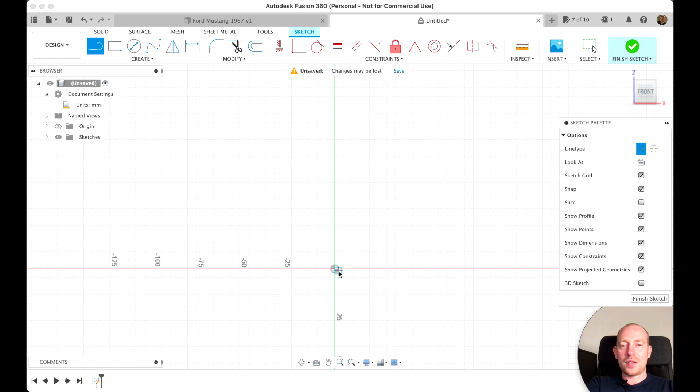So we're gonna go from here up, and that will be 10 in. 10 in means 10 inch, and 10 inch because we will use this center point as our axis. So we're making a 20-inch wheel, so we just need to make half of it, and then the rest will be revolved. Well, let's make one more line,

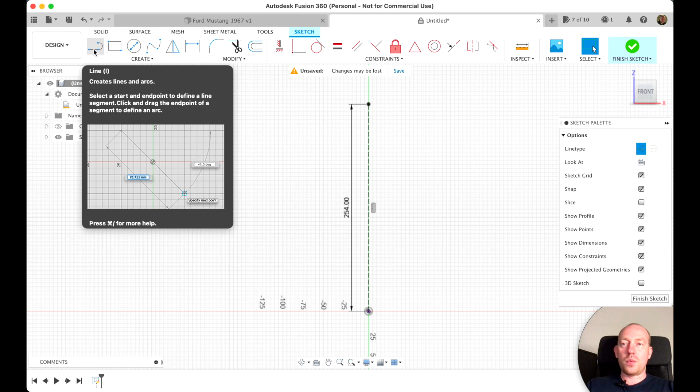and this line will be, you see, I put my mouse on this point, and then when I drag away you see the line, also a kind of construction line, that shows me that this line will be on the same level with this line. So this will be 255 millimeters.

I press enter. Okay, so now we need to align this line with this point so that this line will be in the middle. For that I will press midpoint, choose the line and choose this point. So now it's perfectly aligned. Okay, so now we're gonna start creating our alloy wheel. For that I'm gonna untick construction.

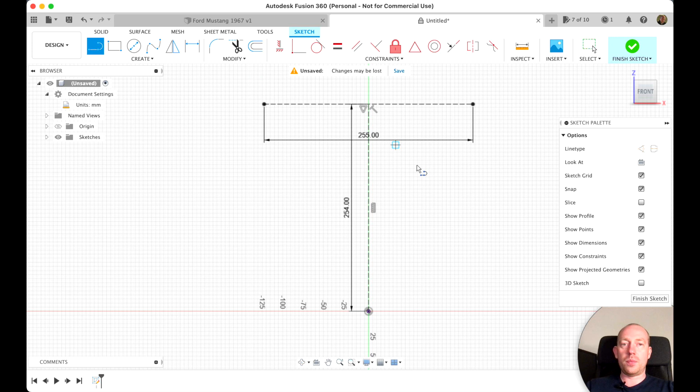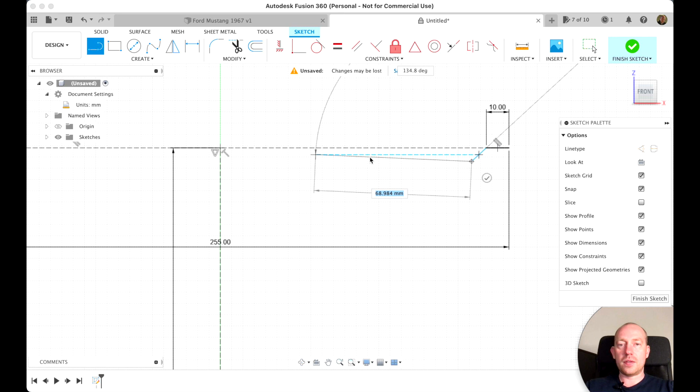I'm gonna press L or just choose line from here, and I'm gonna start creating the alloy wheel. So I start from here, let's say 10 millimeters, enter. Then I press L to make a line again, somewhere at an angle like this. Then another line, let's say until here. Then another line at an angle right here, and like this.

Okay, so now I press letter O in order to make an offset. I choose our sketch that we just drew, and let's say how big are the wheels. I think it's around 10 millimeters. Enter. Okay, so now I'm gonna choose mirror, and what we're going to mirror: this line and this line.

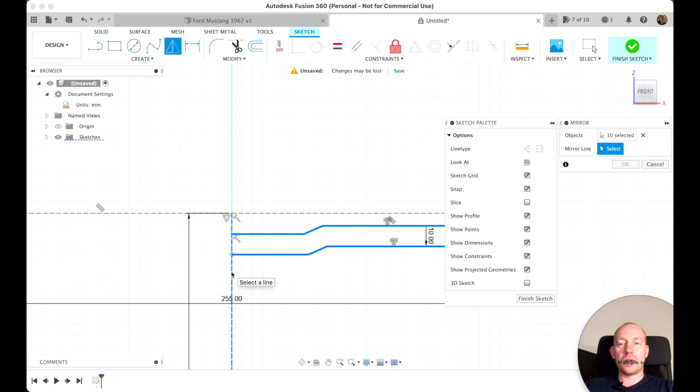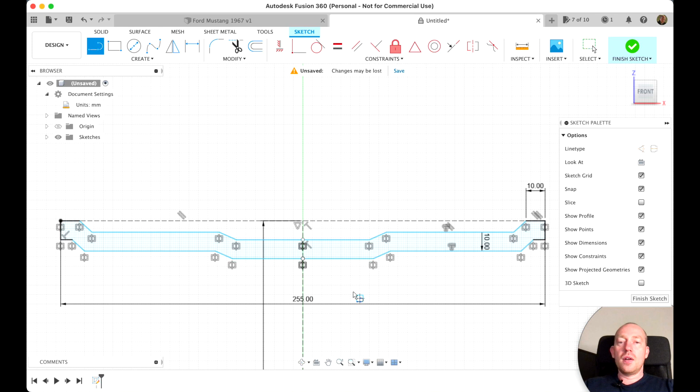I'm double clicking here, and the mirror line will be our construction line. I hit OK. So now we need to close this sketch. I choose line, this point and this point, and then the same on the other side, this point and this point. We could do that before, but I forgot. Okay, so now we have this beautiful shape. I click finish sketch.

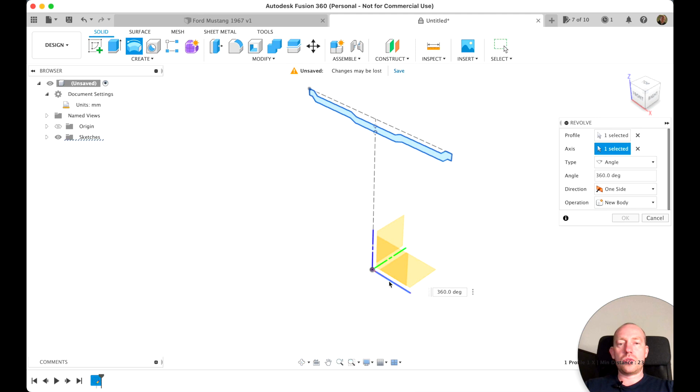Okay, and all we have to do is just revolve. So we revolve this profile, and now it offers us to choose an axis, which is this axis. Yeah, I think it's the x-axis, so I choose this axis, and here you go, we have something that already looks like a wheel. I hit OK.

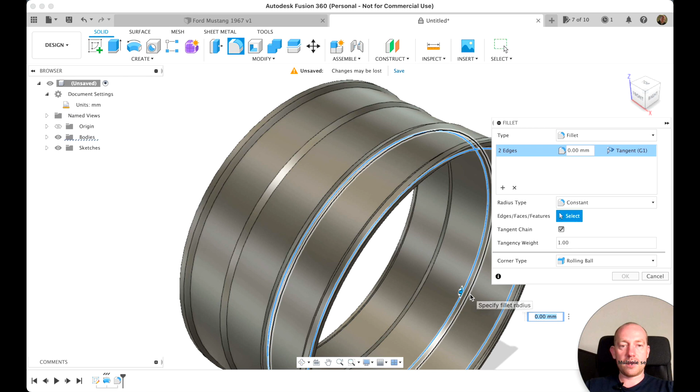Now let's apply some fillets. So I choose fillet, and we need to apply fillet on this line and this line. So let's say 2 millimeters. Enter. Then we apply some fillets on this line, this line, this line, and there. Where is this inside? Let's have a closer look. I think it's here. Let's call it also 2 millimeters, so that the metal doesn't look very rough. Okay, great. So this is our first part.

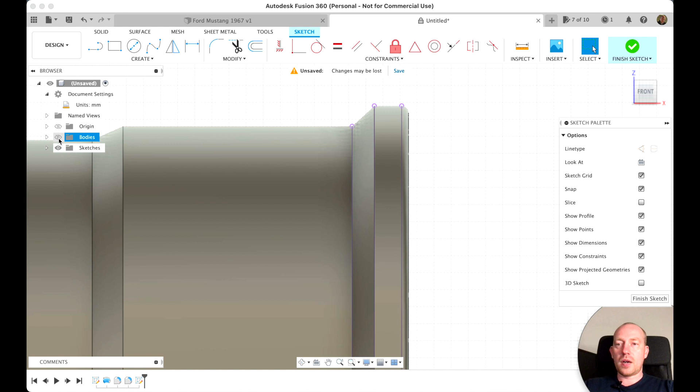Now we create a sketch on this profile. I click on it. I wanna have this and this line in my sketch, so I'm gonna press letter P to project this and this line, maybe this also, and I hit OK. Okay, now I can hide this body. So this is our midpoint of the wheel, so now we need to make a shape, something like this or like this.

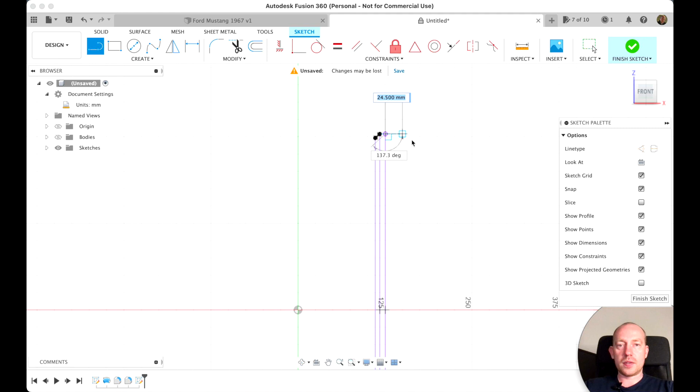You will see why we need this shape. So let's connect first this, and this line, just like that, yeah?

By the way, if it's a black sketch, that means it's fully constrained. You cannot move it, you cannot do anything with that unless you make it unconstrained. If it's a blue sketch, let's say like this one, then you can move it, you can readjust it, and all this kind of stuff. So let's delete this line, we don't need it.

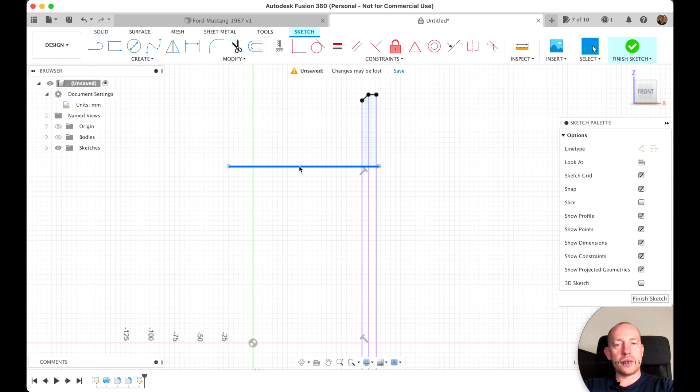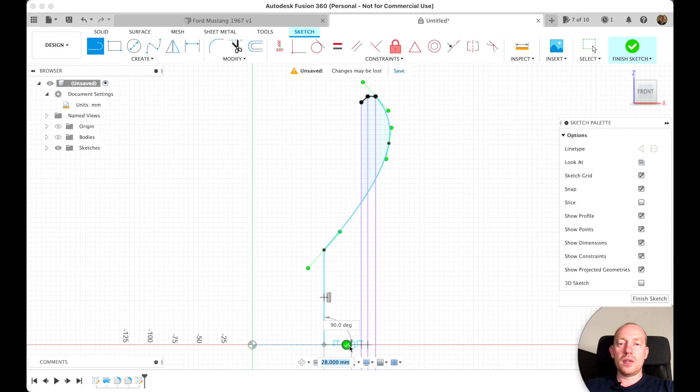Okay, so let's create some fit point spline, starting from here, and then maybe a little bit right here, and then it will go all the way here. I click this green check mark, then I construct one more line from here until, see, I'm using this as a reference, and then I'm dragging, and I need it 90 degrees, finish. So I click exit to exit the line command.

With this we can adjust a little bit the shape or maybe the angle, you can just play with it and see what fits you better. In the future you will see why I'm using that. Okay, so that's our line. Now I double click on this line and I press O to make an offset, and I just move it approximately 15 millimeters. Yeah, I think it will be fine. So 15 millimeters. Okay.

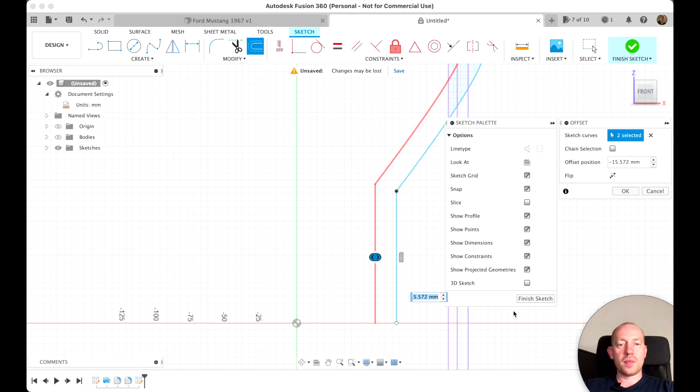Then I press L to make line from here until here, and that's it. If it turns blue, like this inside blue, that means our sketch is closed. So this is a very dirty sketch. Please don't judge me very badly, but we need to make it fast, otherwise we have not much time. Sorry, what I've just did.

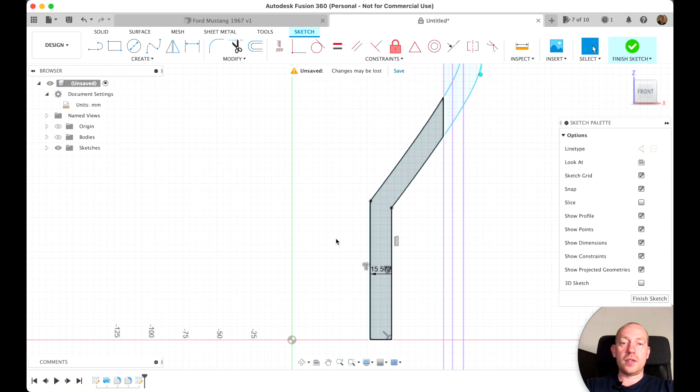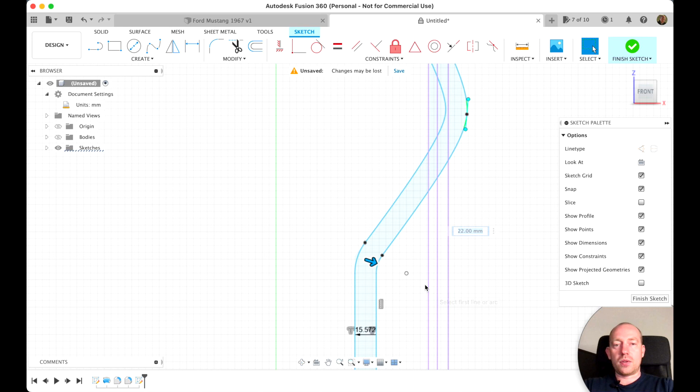Yeah, so I choose fillet here, and I just want these lines to be more smooth. You see, it's like cutting this corner away, yeah? So if I press here, it just cuts this corner. If I press here, then it makes it all smooth. It's not always like that. Sometimes you need to come back to another corner and make it, let's say 22 millimeters, whatever. Okay, enter. So that's our finished sketch.

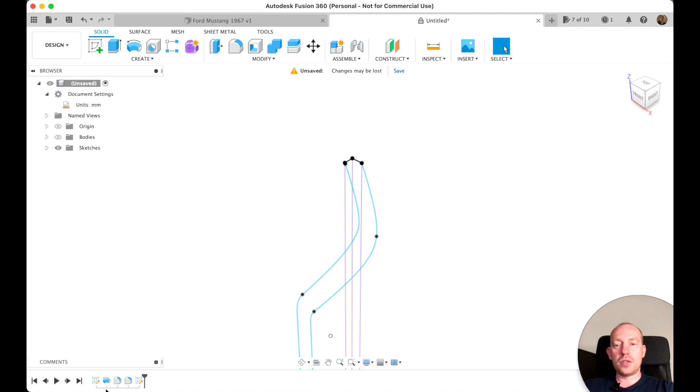And now all we have to do is just revolve this, and need to zoom in. So I'm zooming in, and this. You see, something is not really closed. Cancel. Okay, we can come back in our sketch right here. I right click, edit sketch, and as we can see, yes, this sketch is not closed, so let's just simply close it. Here it doesn't really matter. Okay, now should be fine.

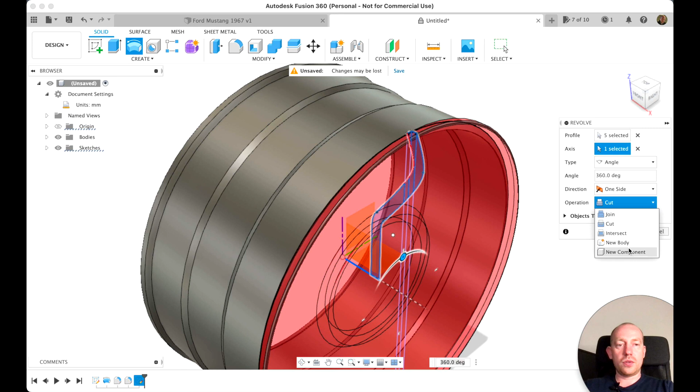Finish sketch. So now we're coming back to revolve this, and this part. Perfect. Now axis will be our x-axis, and since we don't see any bodies, we need to switch on our bodies, right? So now it offers us to cut out of our disk, but no, it's going to be new body. That's it. I press OK. So now from bodies I can hide the actual wheel, and we will have to create sketch on this plane.

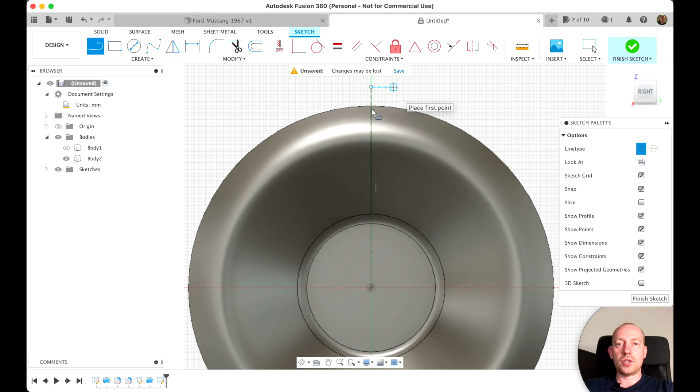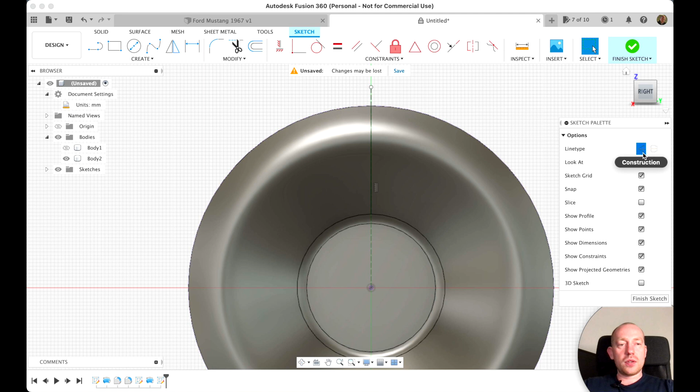Right, so now I will create construction line. This line will be construction from this point until whatever here. Check. Now I press escape to exit line command and press P to project this circle in my sketch. I hit OK. So now, as you can see, if I switch off the body, I have this projection line that we just projected. Okay, I unclick construction. Let's make simple line, yeah.

So it will be something like this, then maybe like this, maybe then it will be, just use your imagination. I don't know, something maybe like this. Then the next one will be like this, like this. Maybe some professional designers will laugh at me right now, but we'll see the result and then we'll see what we get with that.

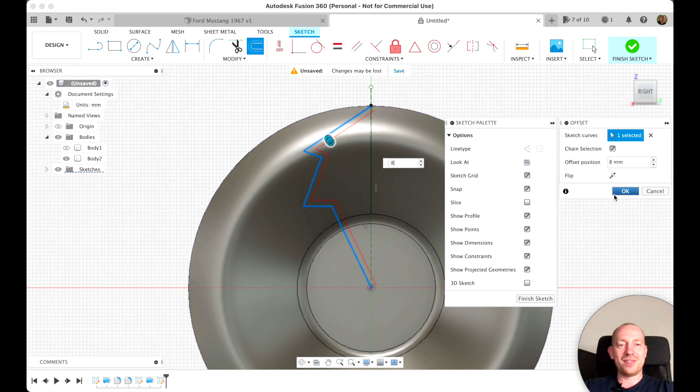Okay, I exit line command, then I need to do offset of this line, so I press letter O. I choose this line. And now I offset this line, let's say this much. It's 8 millimeters, so let's make it 8 sharp. And okay, so now we need to close this sketch. Let's hide the body for now and zoom in there where we need to close our sketch. So I press L to make line from here until here.

Okay, let's trim this part, and let's trim this while we are in trim. To trim, it's either those scissors or you just press letter T to trim.

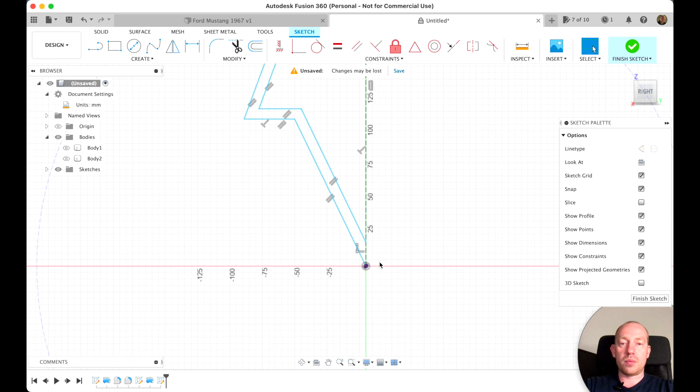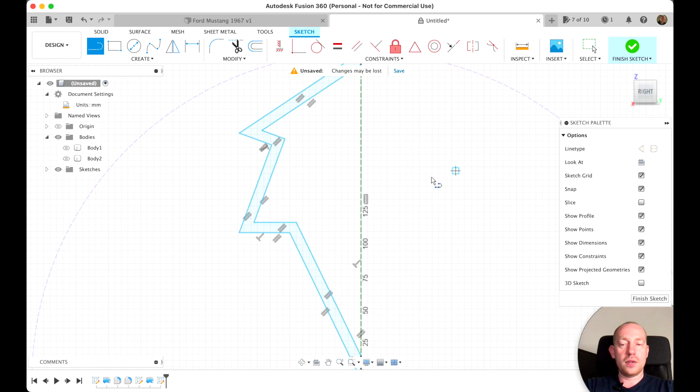So I hit escape to exit trim, then L to make a line from here to here. We see the sketch turns blue, that means it's closed. I press escape, now I press mirror. I double click on this sketch, it selects all of it, then the mirror line will be the line right here, and I click OK.

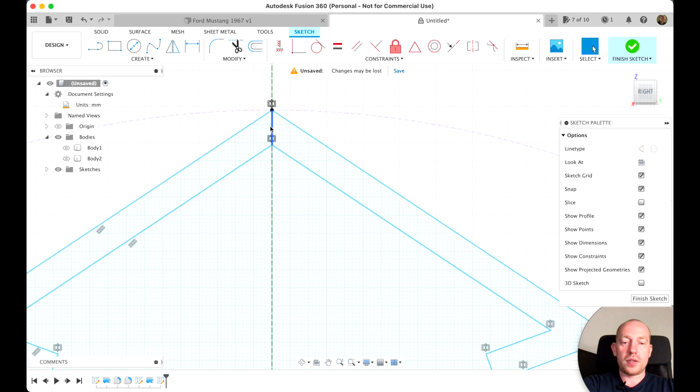Now we need to cut some lines, so this line we don't need actually. I press letter T to trim this line, and then I press letter T to trim this line like that. Okay, so that looks pretty good. Finish sketch.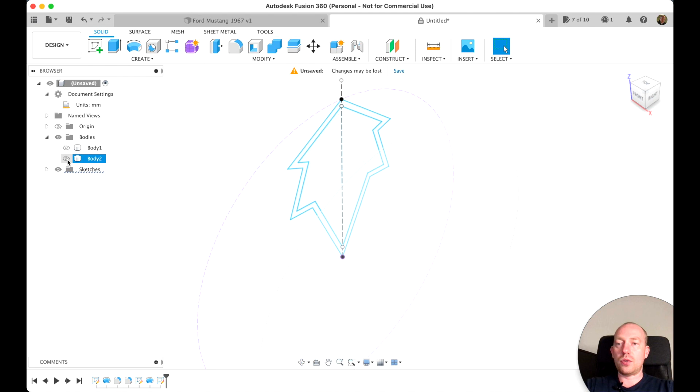Now let's turn our second body on. Extrude. We choose this sketch, we're going to extrude it all the way just like that, and operation will be intersect. So you see we have this beautiful part for our wheel.

It's looking right now like some kind of Christmas tree, but before we actually do the fillet later, we better do the fillet now.

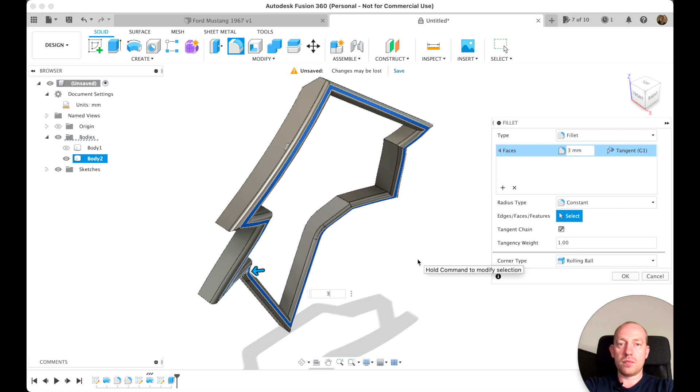So I'm gonna choose this profile, like that. Yep. And the fillet will be, let's say, 3 millimeters, 4 maybe, no 5, it won't let me do 5. Yeah, so let's make it 4. So 4 millimeters will be the fillet for this part. From inside, no, we're not gonna use anything from inside. And then I hit OK.

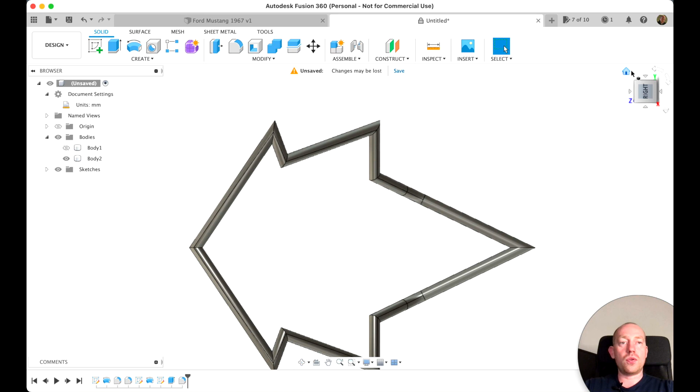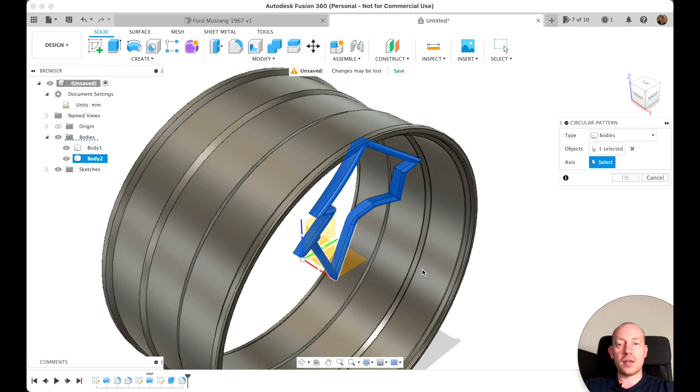Now comes the hardest part for the laptop or whatever computer you're using, because now we're gonna do some circular motions. So what we're gonna do now: create pattern, circular pattern. The type will be bodies, the body will be our new body, and the axis will be this axis, the x-axis. Oh, you see, lately I had 40 pieces in circle, I was working with 40 pieces.

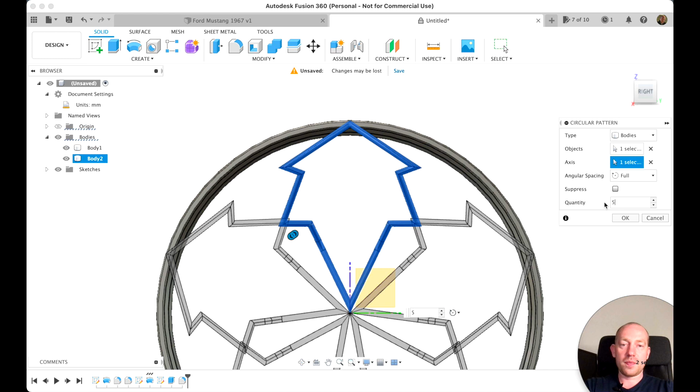It looks pretty good, but it's gonna take us forever to make this. Let's see what happens with 5. It looks very catastrophic, but yeah, so we need, let's say, 18.

So imagine if somebody drives with those kind of wheels. Yeah, I would say, wow, you have cool wheels.

So let's make it 36. You can play with it like you want to play, but the more pieces you have, of course, the slower the computer is. Right now it's just thinking too much.

Okay, so that's our 36. Let's try to reduce a little bit, 30. Oh no, I made it again 230. No.

But I mean, come on, these wheels look like, you know, some future wheels, whatever Tesla is gonna make there, I don't know. So we stop with 30, yeah?

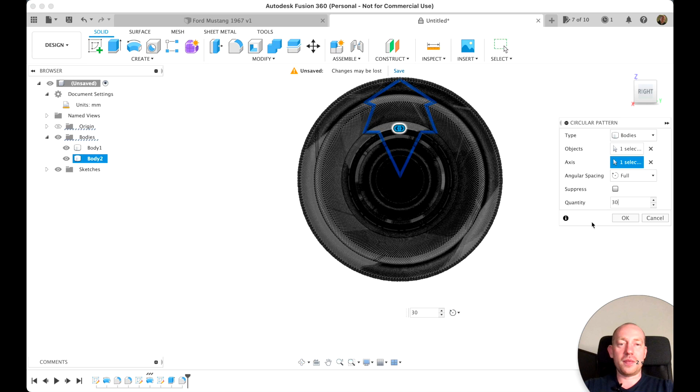Okay, then I just simply click OK. And there you go, now we have kind of 30 bodies, which gives us a lot of headache in the future, because right now we will have to join all of them.

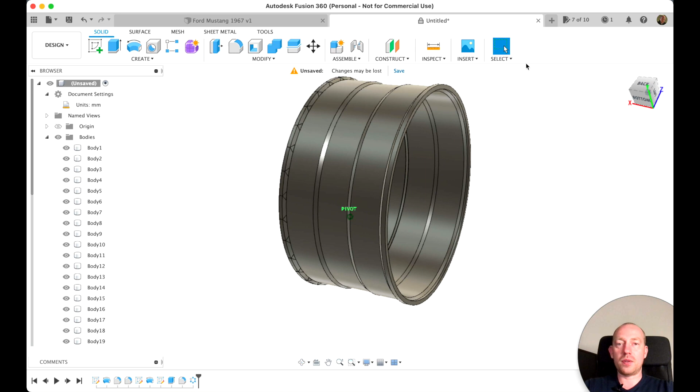Well, it is kind of interesting wheels, if you look at it, wow. Okay, so now we choose this body and we have here combine. Tool bodies will be, let's try to combine half by half.

Let's say these 7 pieces. Operation join, we don't keep the tools, okay. We're gonna do it little by little, because if I take just all of them, then it will be forever.

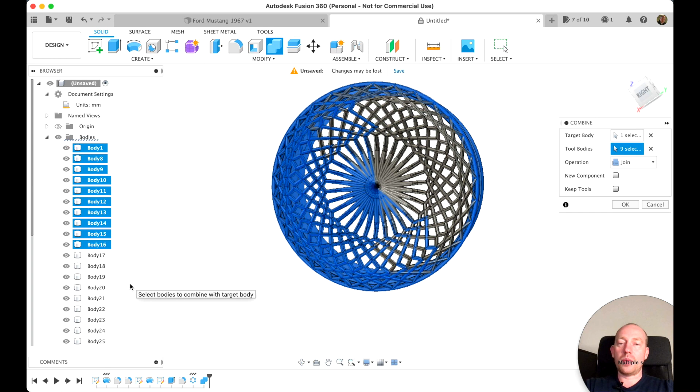Okay, so let's do it again. Target body will be this body, and the tool bodies will be, let's say, from here until here. By the way, how I'm selecting multiple bodies: I just click on one body, then hold shift, and click on the rest. And then it selects the whole bunch of bodies.

As you can see, it slows down the computer. Okay, now when we have all the bodies selected, let's just hit join, and I'm afraid I'll go make a tea. I'll speed up this process while it's joining, but I think it's going to be around 1 or 2 minutes. Don't go away, it's just gonna be for you 2-3 seconds. Okay, let's hit that OK button.

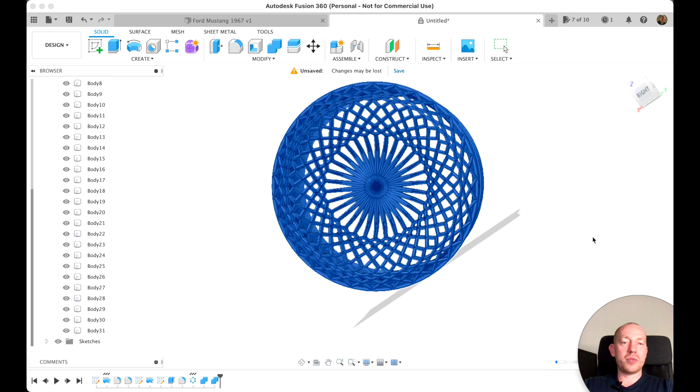Okay, here is some progress bar, and then I'll go make some tea. Okay, looks like it made a great job in creating this wheel. Let's have a look at it. I think it's pretty good, yeah.

Thank you very much, computer, you did a great job for us. So we don't need to construct something super extraordinary. Right now, we need to put the tires on it.

So for that, we're going to activate this very first sketch, and let's create one more on this plane. So we can hide this body, and now we're just making the tires.

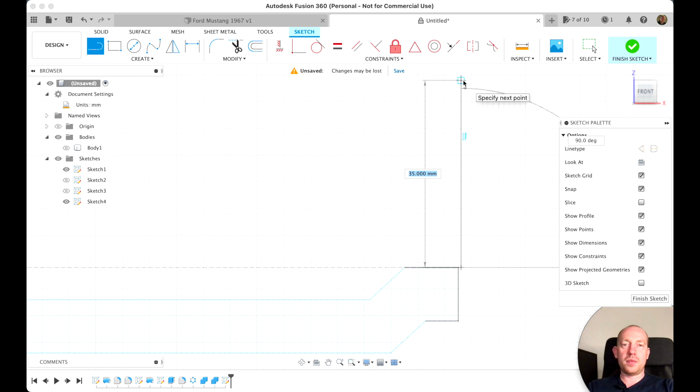Let's say a little bit from here. How big is the tire? Well, it will be 35 millimeters. Then we're gonna go just simple like that, like that. It's just for formalities, you know, that we have a fully proper tire.

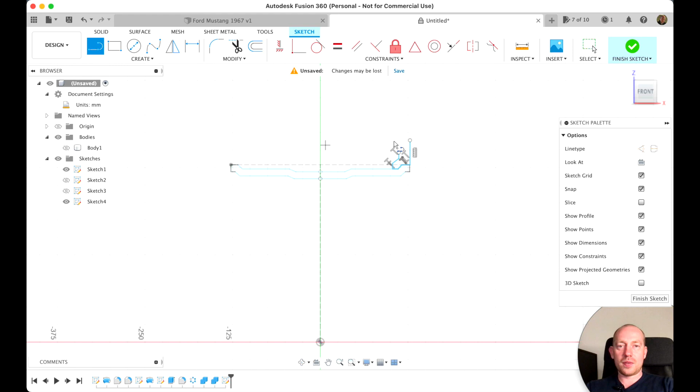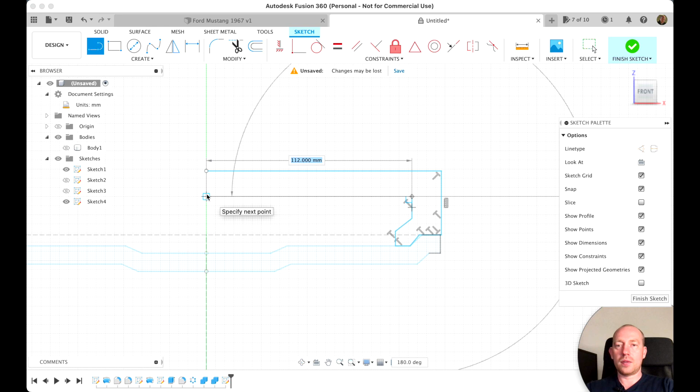I press L, line from this point and from this point, just like that. And let's make it higher until here, and then one more line from here until here. So 90 degrees, 180 degrees, yes, correct. Like that.

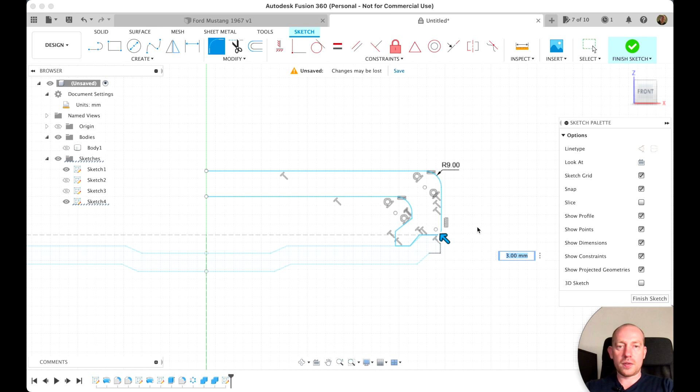Okay, that looks like a good tire for me. I choose fillet, this and this, 9 millimeters, okay. And then here also we make some fillet. Then I'll make one more fillet right here, just a small one. Okay, that looks pretty good.

Now we will have to create a construction line, and let's say something like this. Okay, and now we just mirror all this sketch. I double click on the sketch here against this line. Okay, so that will be our tire. Let's finish the sketch and let's revolve, right here, revolve this sketch on this axis.

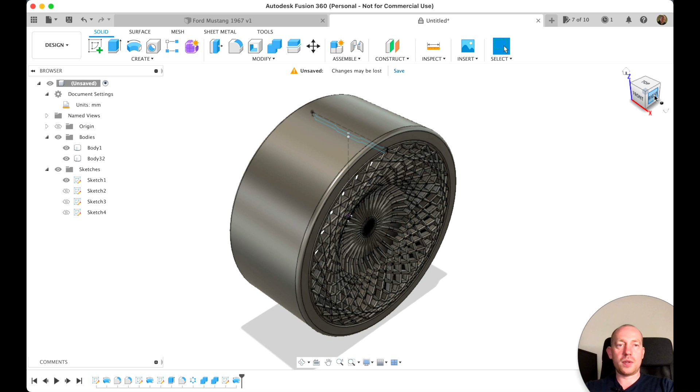New body. Okay, now let's switch it on. Okay, we have something like a wheel, a very weird looking wheel, but it's okay.

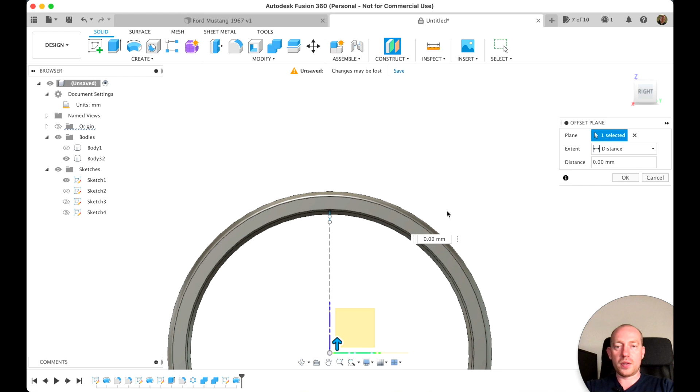So now let's make some drawings on this wheel. We will have to construct an offset plane from this plane. So I choose construct, I choose this plane, I look to the right side of my wheel, and I just drag it until it's slightly on top of the wheel, something like that, yeah, and I hit OK.

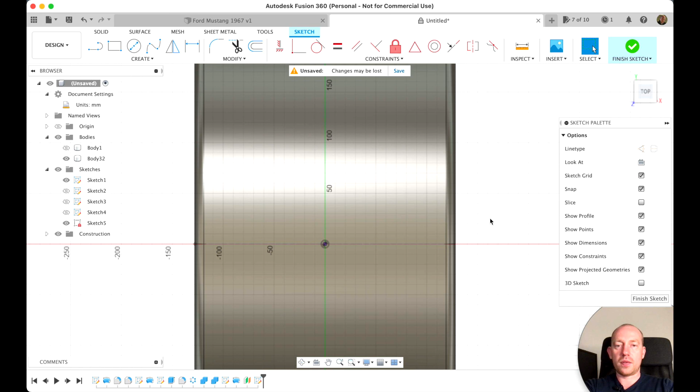So now we create a sketch on this plane. As you can see, we're already working with planes. And now what we have to do is create nice lines, let's say somewhere from here until here, until here. Okay, now offset this line 3 millimeters, enter.

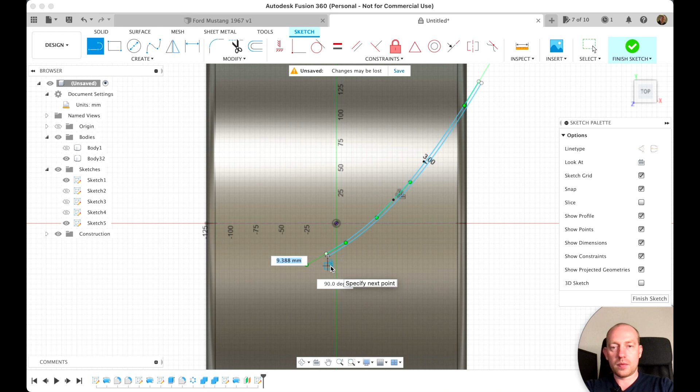Now connect this, sorry, something is wrong, connect this and this, then we connect this and this. So now I want to approximate this center will be parallel with this center. So I exit the line command, I select everything, I press M to move, and basically now I can move.

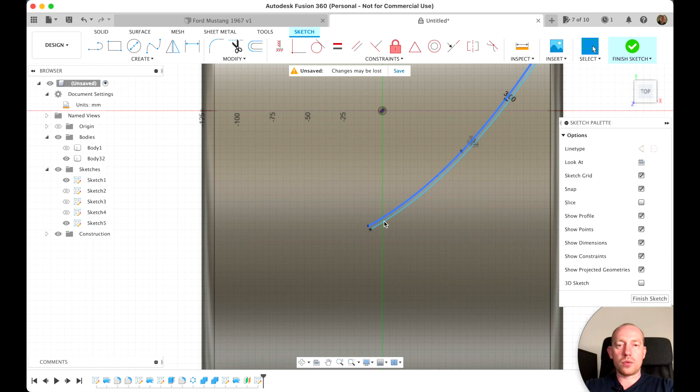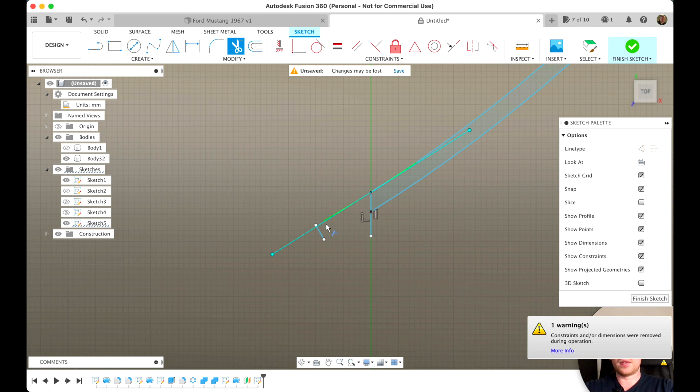So let's go down, somewhere here. Okay, enter. Now we need to close the sketch exactly right here. So I'll just choose L for line from here until let's do it from here. Okay, T to trim this, and this sketch. Okay, looks good to me.

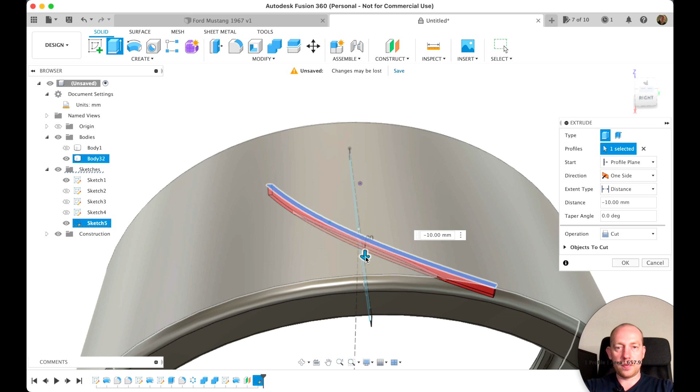Finish sketch. Now let's extrude this profile in direction of our tire. So it will be something like this, I guess. Can even do a little bit more. Okay.

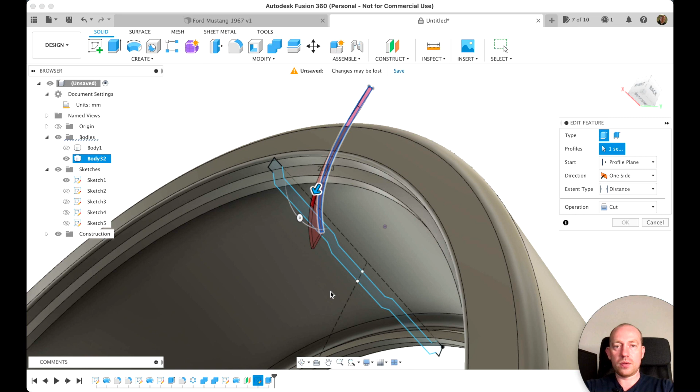Operation cut. As you can see, we've gone through the wheel. Okay, we come back, edit feature. Let's make it slightly less. Okay.

Perfect. So now let's create a circular pattern. We choose pattern, circular pattern. Right here we are choosing features. Objects will be our extrusion objects. Axis will be this axis, and now we just choose how many. So let's say 60. I think it's okay. Let's just hit OK.

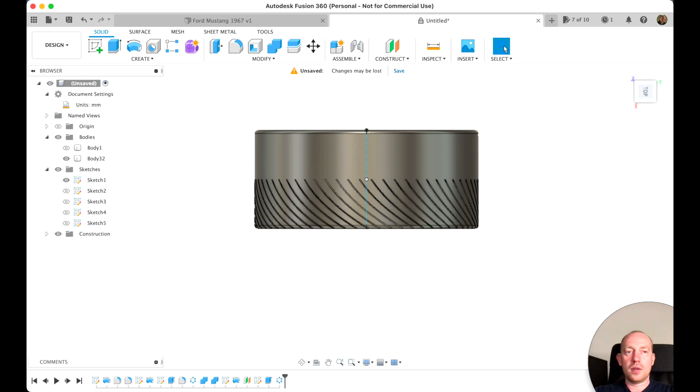Now again, computer is calculating something. So that's the half of our tire. Now let's mirror that on the other side.

So we're gonna construct another plane, a mid plane from this plane until this plane. So it's going to be like a mid plane between two planes. Yeah, so we're choosing 1, 2, and it becomes like that. Okay.

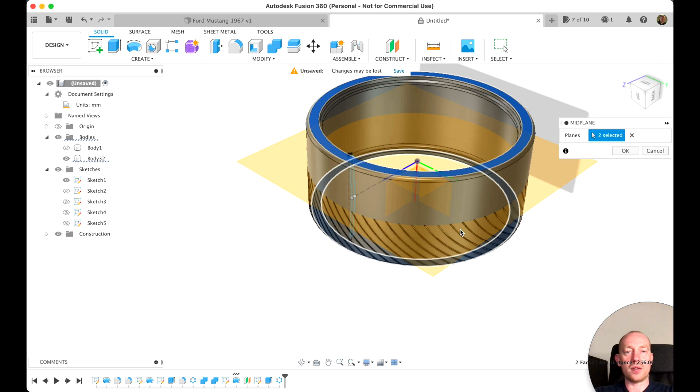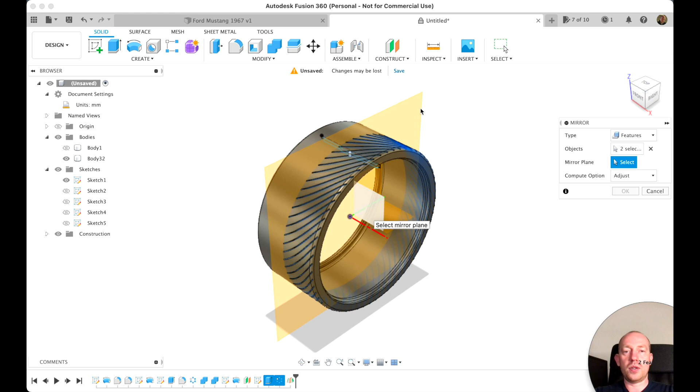Now all we do is create mirror, mirror, mirror right here. So we are choosing features, which is this extrusion and this circular pattern. Otherwise it's gonna make either circular, if we choose circular pattern, it's not going to be our very first extrusion. And the mirror plane will be this newly created mid plane, just like that. And I hit OK.

Now let's give some time for our computer to think. Okay, now we can hide the construction plane, and we have some kind of tire shape, whatever, like that.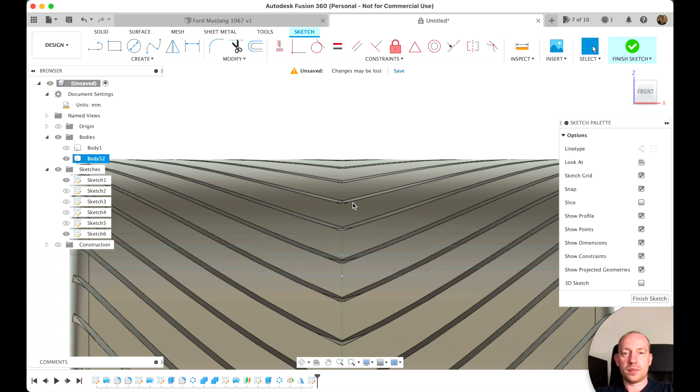So then let's just make some cutouts like real tires have, you know, in the middle. We're going to create another sketch on this plane, and let's make it somewhere in the middle, something like a rectangular shape, a center rectangle. So let's call it from here, like that. That will be number one.

Then somewhere here, let's make a construction line. No, sorry, not so fast. Let's make another one right here, something more skinny. And let's make one more right here, something like that. Yeah. And then we create a construction line from here until here.

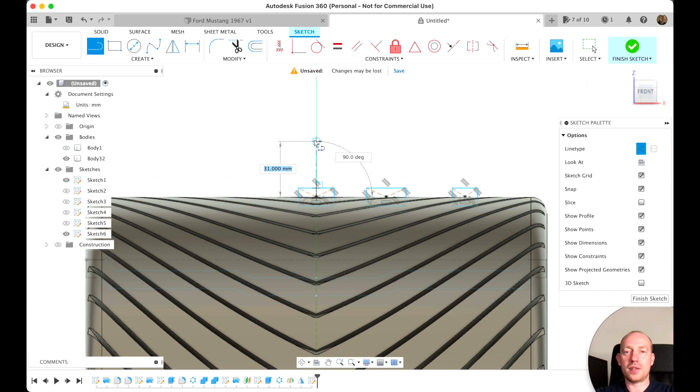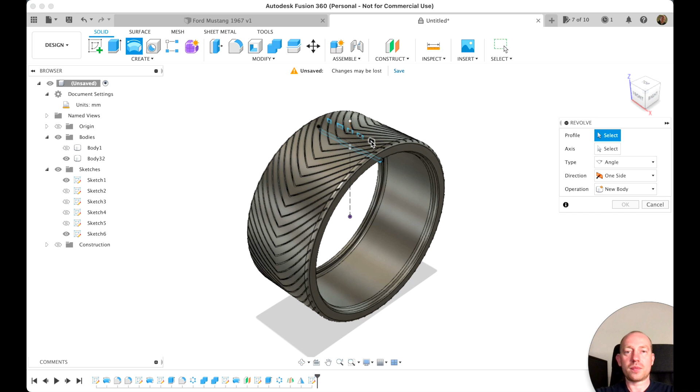Check. And now we mirror. I double click this and I double click this against this axis or line. Okay, so now we have this beautiful finished sketch. And now revolve this and this, this and that, and this, around this axis.

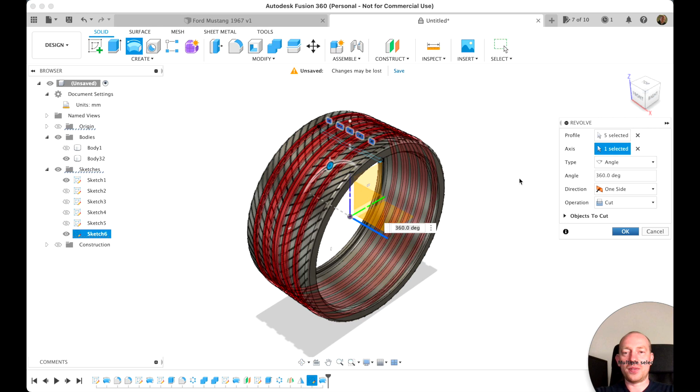Give the computer some time to think. Okay, here we go. Operation: cut. Let's do it. So there you go, we have a beautiful, super modern tire.

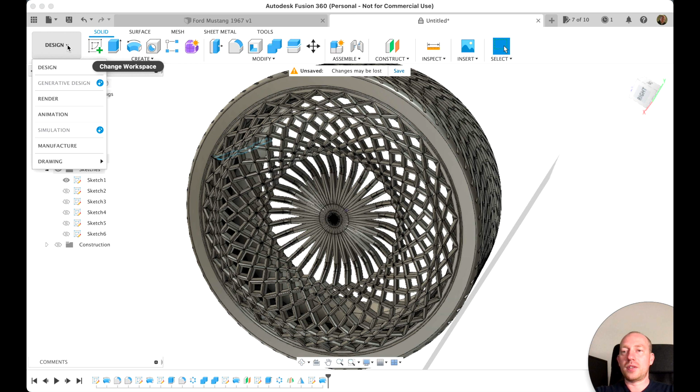It's amazing. Let's see how it looks with our alloy wheel. That's our alloy wheel. Wow, cool, great. So let's give it a little bit of render and we'll see how it's going to work together.

So of course we're going to choose appearance, just for the view. We're going to do a proper render at the end of this tutorial. So I'm choosing, where is it, the rubber? I guess it was rubber. Yeah, that's the one. We're going to put rubber on rubber, and for the wheel, aluminium, some aluminium.

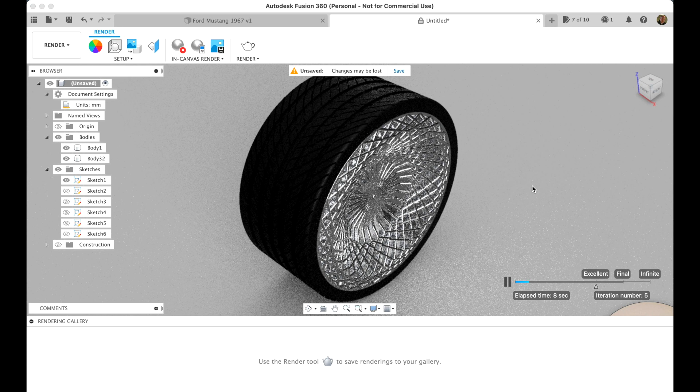Let's give it a little bit of render, and that's going to be our really beautiful wheels. Well, I think they're quite beautiful. Maybe somebody will make something else, but that's going to be our wheels for our Ford Mustang.

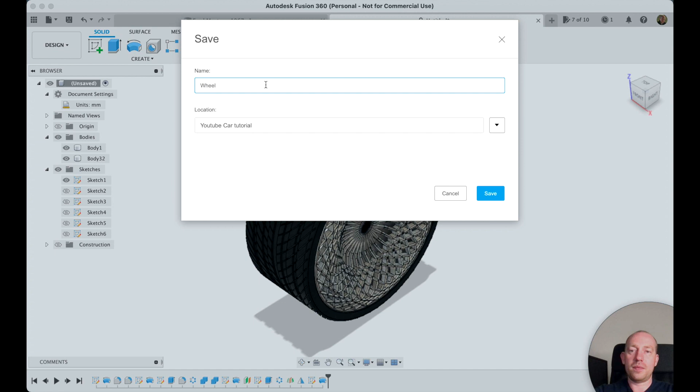Okay, so let's stop this render, whatever, it looks good, amazing. So we go back to design, right where we stopped. Okay, so now we have this wheel. What we have to do is just save it in the same folder where we created the car, preferably so that you have all the parts together, and let's call it wheel. Save. Okay, now this wheel is saved, or actually still saving. It's going to be uploaded to the cloud. Okay, I close. That's it.

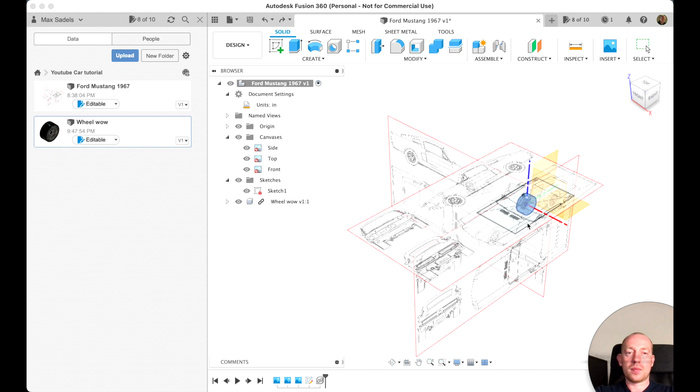So now we have this car. To insert this wheel into our project, we just click here. We go to our folder, and then we choose wheel, and we can just insert it into the current design. And there you go, we have this wheel in our project.

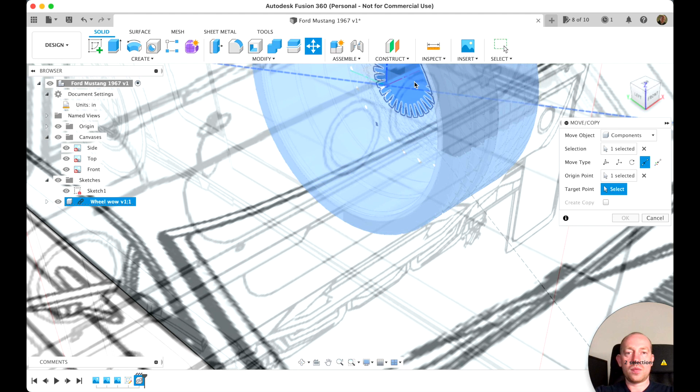Let's close this. So we need to move it to the sketch where the real wheel will be. So the origin point will be this, and the target point will be this little corner, this little dot of our sketch. And I hit OK.

So that's our wheel for this tutorial. Let's see how it's going to look with the car. Okay, we need to move a little bit the sketch or either the car, but it is going to be like that, yes. So let's do it now for the sake of this tutorial.

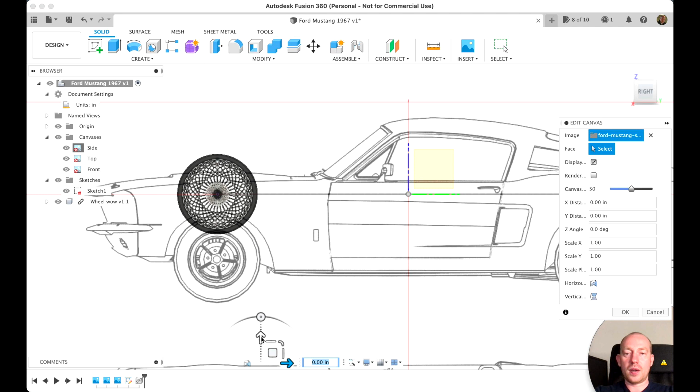I'm going to the side view, edit canvas, and I'm going to move it up until it fits in the wheel.

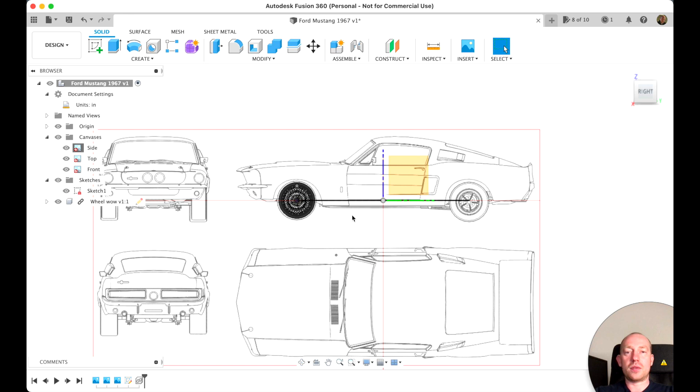So in the next tutorial, we're going to arrange all the wheels around the car, make some copies of the wheels, and start to model our beautiful car. I don't know, I like these wheels actually. It's not like they were meant for this car, but they're looking good. Yeah, I think they will be fine.